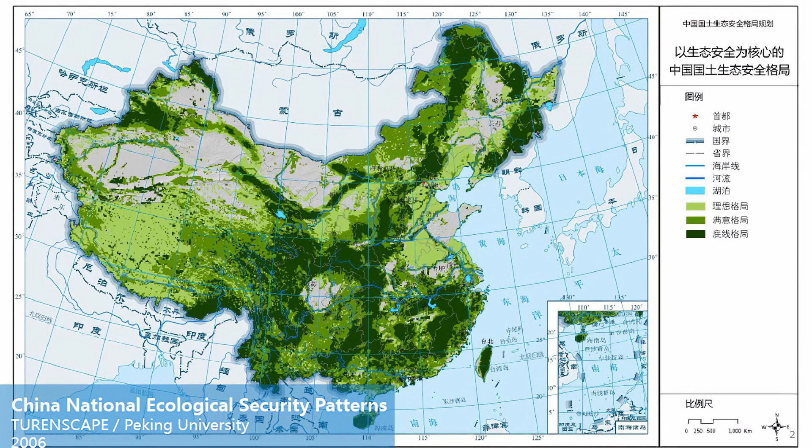That means we Chinese have been living with and managing water for thousands of years. Our ancestors had lots of wisdom of adapting to water. Let's look at these typical small villages in southern China. This is actually Professor Kongjian Yu's hometown, a typical village in southern China, which has had a great influence on his design philosophy.

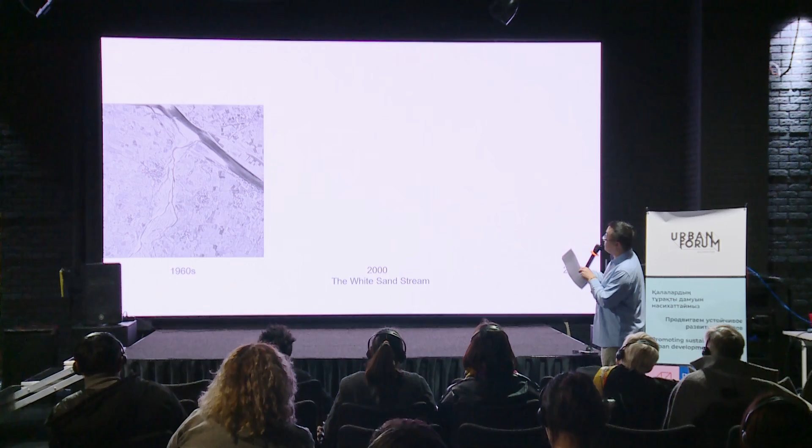However, when urbanization comes, we channelize the river to grab land for development, but we forgot things we did for hundreds and thousands of years, forgot those nature-based solutions. You can see how Professor Yu's hometown was transformed from this natural form of the river to this channelized canal.

This is the 1960s, 2000, and today. This makes the river lose its resilience. We spent billions of dollars channelizing the river, building dams, trying to protect villages and cities from being flooded. But actually, the flood only became more serious. Why? Because we enforce and accumulate the disaster, the destructive force of nature and destructive force of water. That is what we experienced in China about 20 years ago.

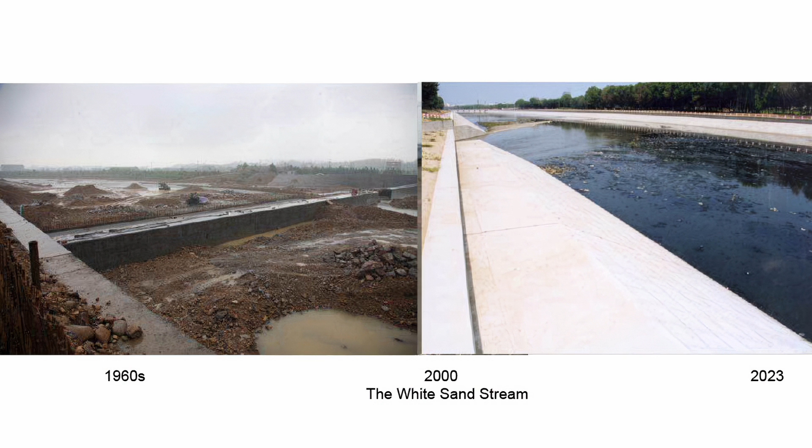Due to climate change, the whole world now faces more and more severe challenges like flood, drought, pollution, and habitat loss. Conventional solutions are single-minded. Of course they can be effective in the short term, but in the long term they literally destroy the natural system. But have we solved the problem yet?

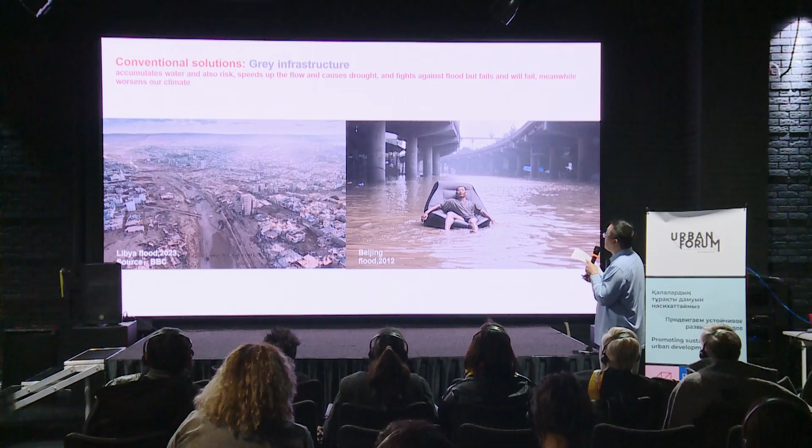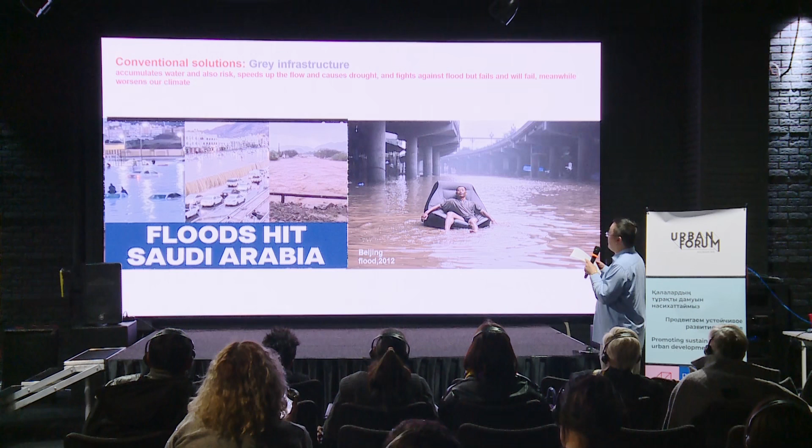Certainly not. In 2012, 79 people were killed due to urban flooding in Beijing, our capital city. Not only in Beijing - similar things happened in Libya and Brazil and even Saudi Arabia, places you'd think would never have this event, but it does happen. The conventional solutions have failed and will continue to fail.

And if you build a higher dam, you will have more carbon emission. According to research, 8% of carbon emissions come from cement.

So you can imagine how much carbon emission could happen if developing countries are going to build the same number of concrete dams as China or the United States.

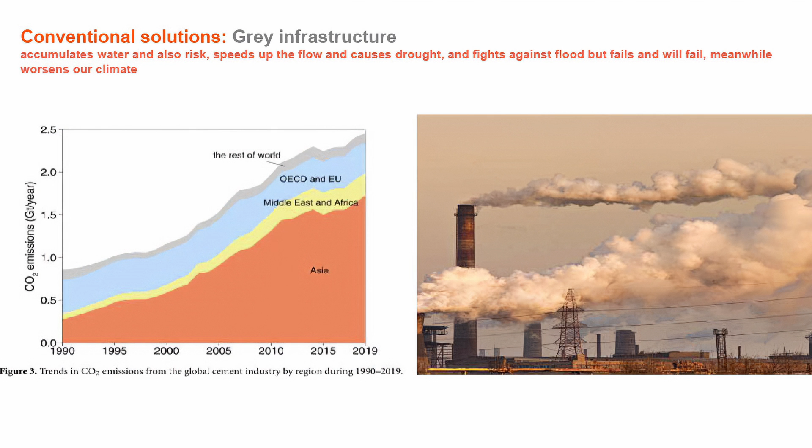According to another research, 40% of sea level rise is actually caused by the depletion of groundwater and the drop of the aquifer. This water should have been held under the ground, not in the sea. But we drain all the water into the sea and pump out groundwater for irrigation. Many people talk about the melting of glaciers, but almost no one talks about the groundwater.

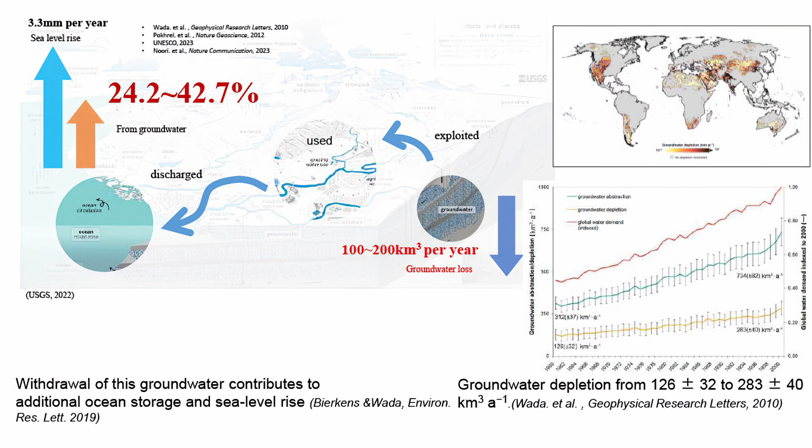If we can control and maintain the water on the ground, on the land, we can actually solve about half of the problem. So we have to find an alternative solution to make use of water and solve the problem holistically. This comes to the nature-based solution, ecological infrastructure, not the concrete or gray infrastructure. Of course gray infrastructure can solve immediate problems in the short term, but in the long term we have to consider the nature-based solution.

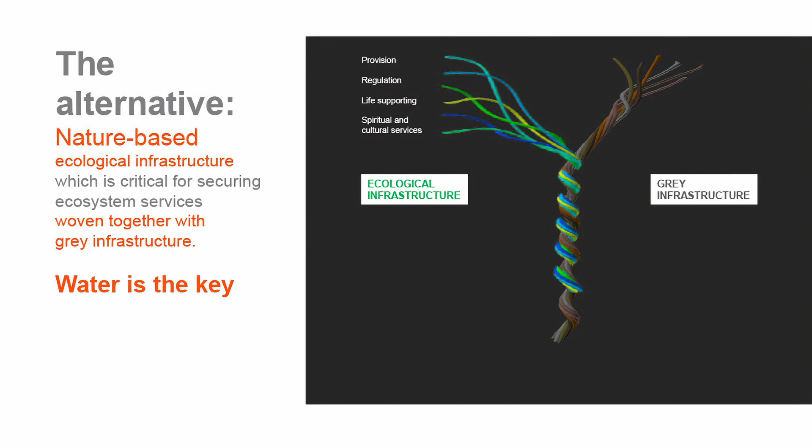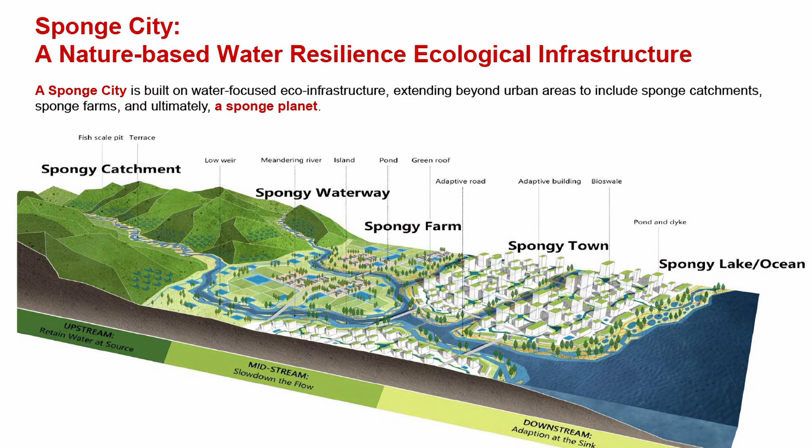And for this, water is the key. A city built on water-centered ecological infrastructure is what we call a sponge city. Such ecological infrastructure must be built beyond the boundary of the city. We also need sponge catchment, sponge farm, and ultimately even sponge planet. Think about the upstream terraces and slopes, farms, and then you have the city and the coastal front. This systematic solution builds a resilient city, a resilient territory, a resilient nation.

So its key philosophy is to retain water at the source. Whenever the water falls, you should keep it, and then slow down its flow. Don't channelize it and flush it away like a toilet. Be adaptive, embrace the water at the end of the watershed instead of building a wall. This kind of philosophy is totally opposite to the conventional solution of gray infrastructure.

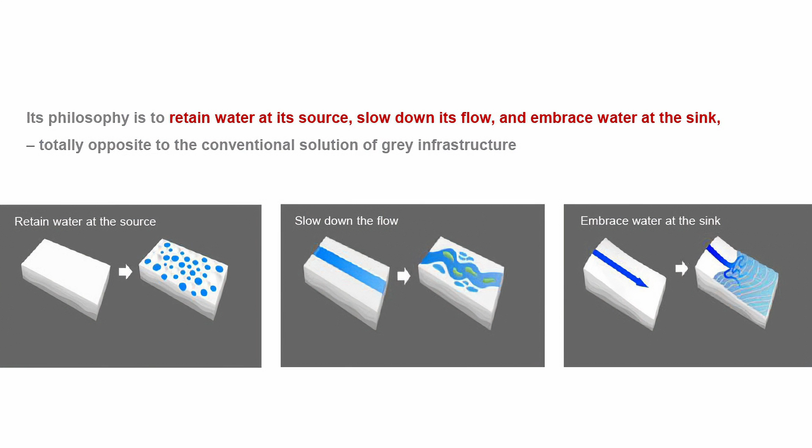The inspiration comes from our monsoon culture. Look at how the Chinese built their territory for 2,000 years, with rice paddies—imagine hundreds of thousands of rice paddies on the slope to catch thousands of millimeters of rainfall. A very simple tool, not so complicated.

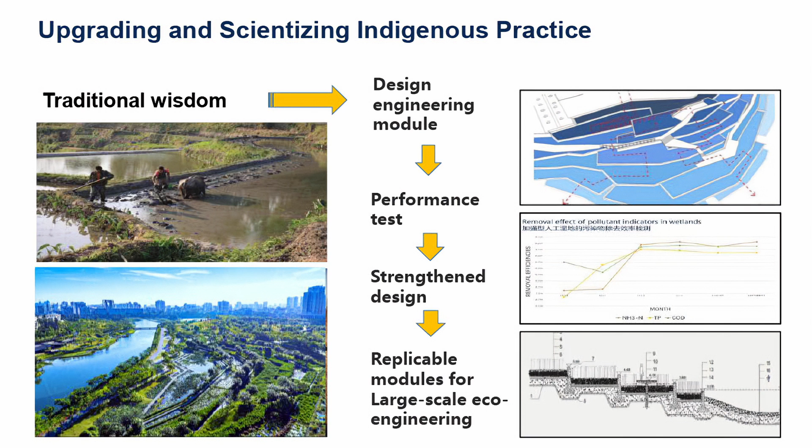And in the delta area, where the flood merges, you have a similar strategy—this pond and dike system is productive, diverse, and beautiful at the same time. We develop and upgrade this traditional Asian wisdom into replicable design and engineering modules with scientific method and proof, applying them to modern ecological engineering to retain water and make it more productive, diverse, and beautiful. That doesn't cost much—techniques such as terracing, weiring, diking, ponding, and islanding.

These all come from Asian wisdom and knowledge, and are not limited to monsoon areas, but can be applied all over the world. For the past 25 years, we have built more than 1,000 projects in more than 200 cities. Most of them have proved to be very successful, and certainly they didn't solve all the problems, but I can show you what can be done and what cannot.

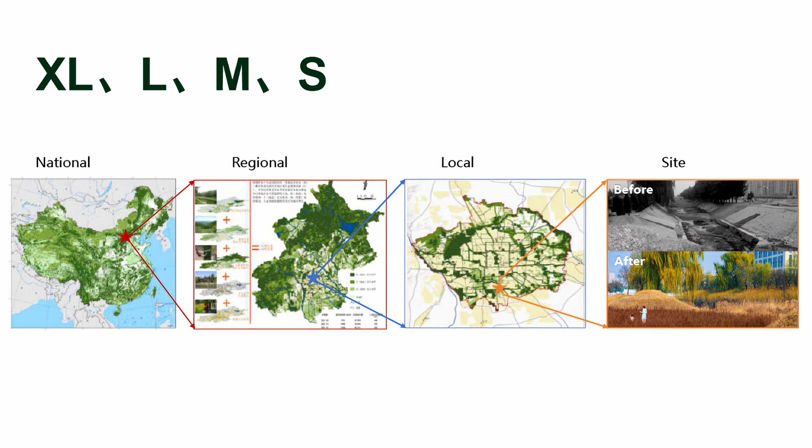All of these projects share a common feature: they are always holistically and systematically designed to provide multiple kinds of ecosystem services for native species, for people, and for the planet as a whole. This kind of infrastructure must be planned across scales, from national territory all the way to the community garden—multiple scales, dealt with systematically.

For example, this is the sponge city planning we did for Guangzhou City—7,000 square kilometers. We identified the space that can retain water at the upstream, slow down the water during its flow, and we keep all the creeks, rivers, and streams to slow down the water. At the end, where the city was usually built, we need to find solutions to adapt to flood and drought.

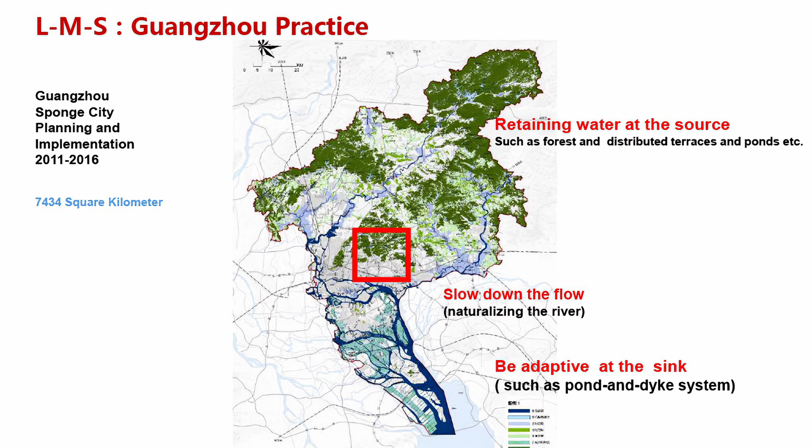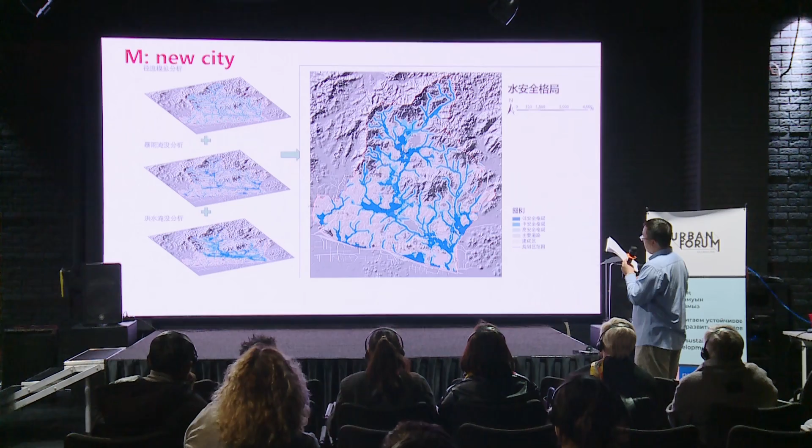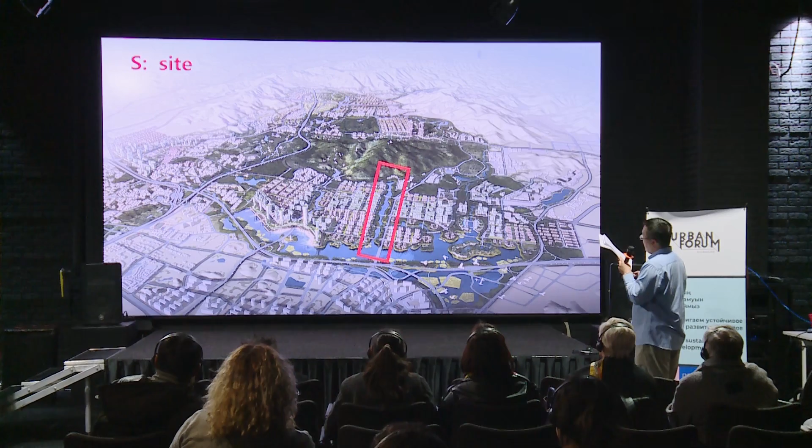And then at the site scale, we built a constructed project for this green corridor. So you can see how it was built, very beautiful. So people love it, birds come to the city, the temperature gets cooler, and certainly the water can get purified.

And then I will show you some examples that reflect the key philosophy of the nature-based smart city. So the first principle is to retain the water at the source. This project is located in Sanya City in southern China. First we did the urban scale smart city master plan and identified this space where the urban flood happened every year, and the project is right in the middle of the city, called Dong'an Wetland Park.

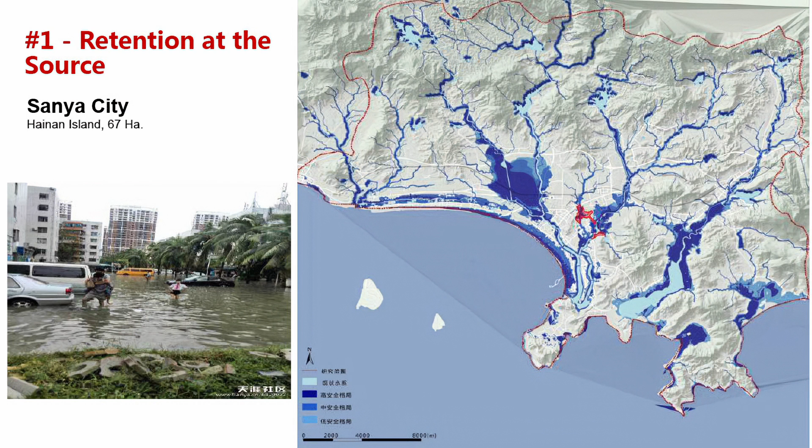So our solution was quite simple. We terraced the slope, ponding the ground, and islanding the water. So in just 1 year, this is the construction process, we transformed this flooded area into a very beautiful urban park. So you can see right in the middle of the city, we created a sponge that can not only regulate water, but also serve as a beautiful park, and also habitat for birds and other species, so people enjoy it.

And this boardwalk, in normal seasons, is for people, and in the rainy seasons, for a week or a month, it can be flooded like this. So that makes the park a resilient park, and it can contain more than 1 million cubic meters of water. So this is an image in 2024. When the historical flood comes, the park still works very well, and people can still use it through this continuous skywalk system.

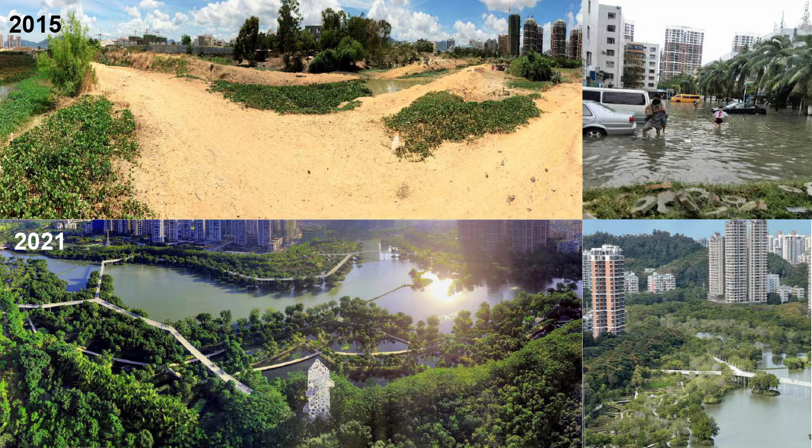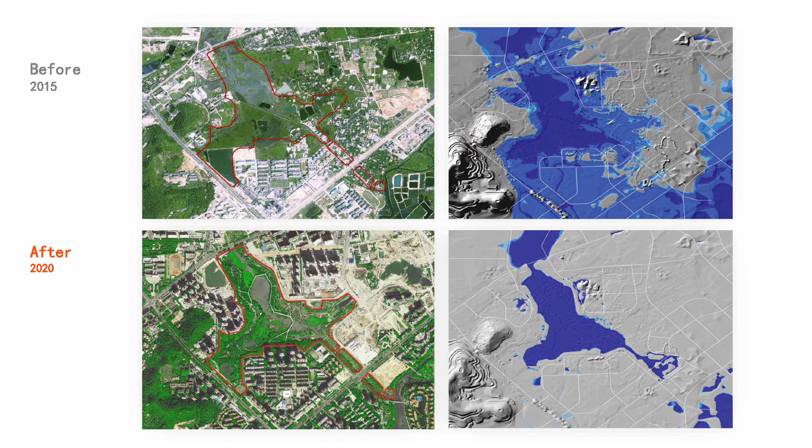So this is also a comparison of the before and after. 10 years ago, it was an abandoned land and also a flooded land. And today, it becomes a vibrant urban public space. And this is the flooded area 10 years ago. And after the park was built, you can see the flooded area decreased significantly. And also you can see the park works as a catalyzer for urban development. Now this area is working as the new CBD area of the city.

So here comes another case. Not just in China, we can have similar cases everywhere. Here is the Benjakitti Forest Park in Bangkok, Thailand. We did this project during the COVID-19 pandemic. It's also right in the middle of the city. It used to be a cigarette factory. The Bangkok government wanted to remove it and build a park for the citizens of Bangkok, and also as a gift for the Queen Mother's birthday. Also, they wanted to solve the problem of urban flood, of course.

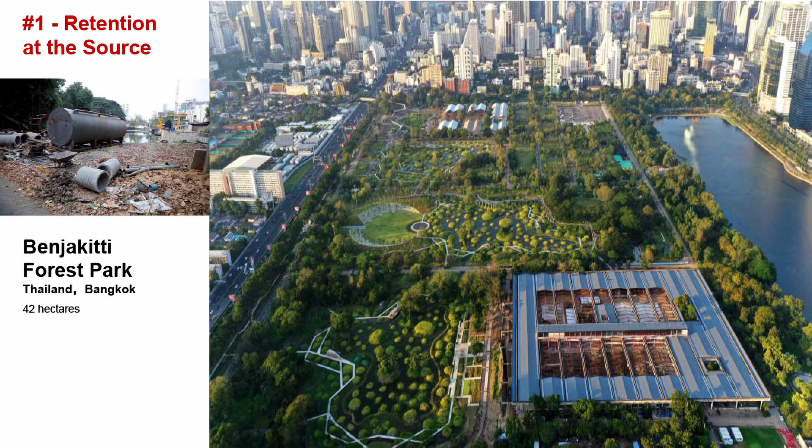So what we did is a very simple solution. It can be created by even one excavator very fast, and only in 1 year you can build it. This is the construction process, and that is today. As soon as it opened, it became the most popular park in Bangkok. Here are some of our major concepts.

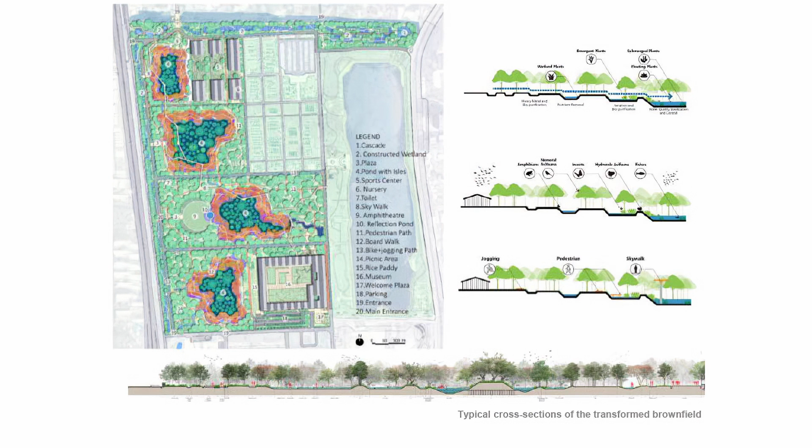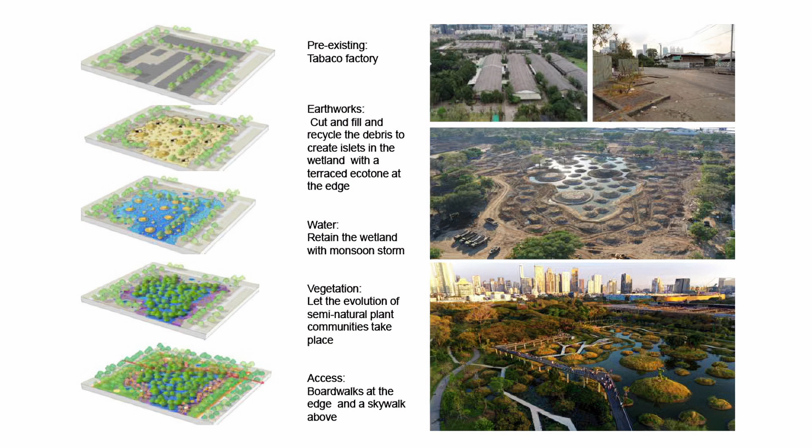First, we removed all the concrete hard surface of the ground and then used the simple cut and fill technique to keep the budget low and also balance the soil and create a sponge, an urban reservoir with hundreds of small islands. These small islands can purify the contaminated water from the canal in the north and let water come into the park. Then we integrated green and blue together to create an urban jungle for biodiversity. The last thing is to add a continuous pedestrian system and a multi-dimensional walking system for immersive activities in nature.

These are current photos. So you can see right in the middle of the city, the CBD, with diversity of space and a place for people. All the existing trees are preserved and protected on site. Most of the activities take place under the canopy, which mitigates the urban heat island effect a lot. And as I mentioned, these simple solutions keep the budget at a very low level. The construction cost is less than $20 per square meter. It's very low, less than a quarter compared to a normal park.

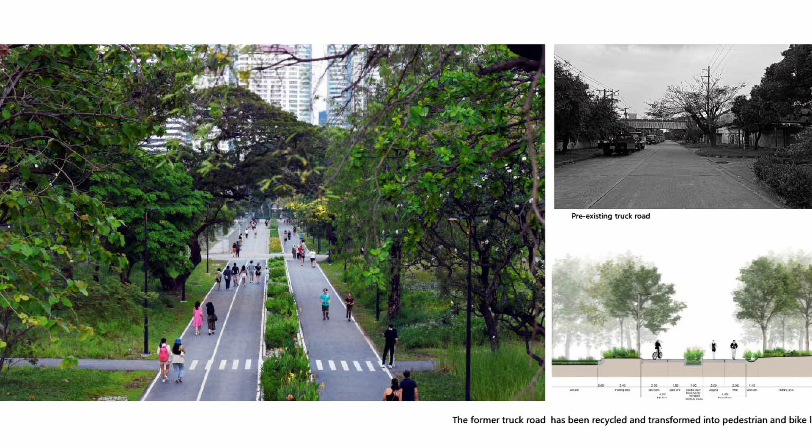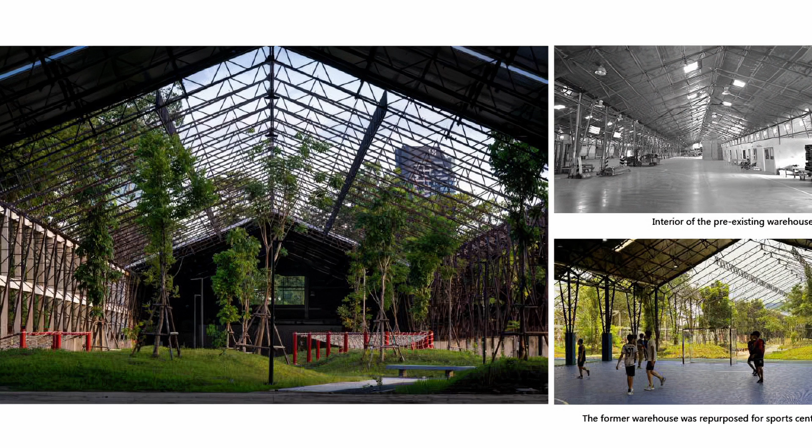And certainly it becomes the catalyst for urban development, and the property value increased dramatically. The pre-existing truck road became this pedestrian road with sponge city facilities such as bioretention ponds, and the previous warehouse was transformed into public space integrated with nature, working as a sports field or a stadium.

The water must be purified. The polluted water nearby, you can see from the north, is a very polluted canal. So the water from the canal is purified by our nature-based wetland system, and it has proved to be effective through the continuous monitoring of local environmental groups. Their data shows that the water purification effect is very good.

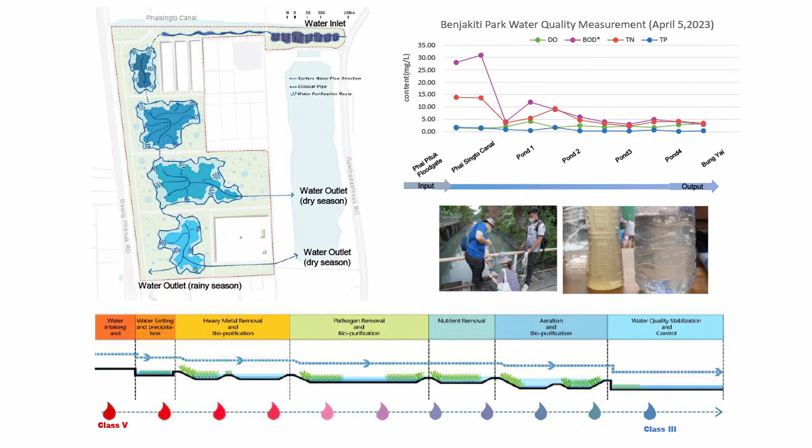The park became a rich biodiversity area for birds. According to the statistics, since the opening of the park, 91 species of birds have been observed in the park. So it also became a very good environmental education center for children. Also, on social media, the local people voted the park as the best park in Bangkok.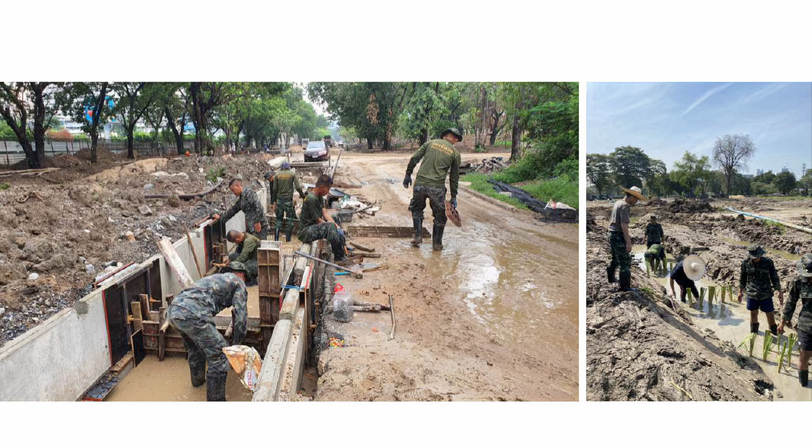Under special conditions because of COVID-19, they could not find enough skilled workers to build the park. But since our solution is quite simple, even the army could finish the construction process. So everywhere in the park was built by the army in just 18 months.

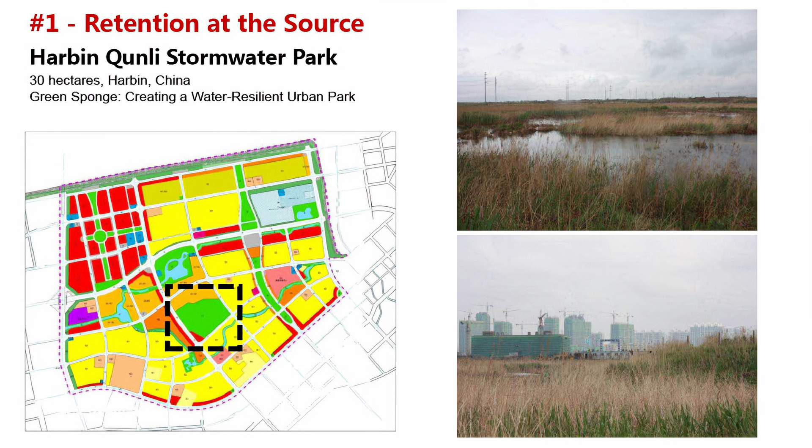And not only in tropical areas, the similar solution also works in relatively dry and cold areas. This project is in Harbin City in northern China, near the China and Russia boundary. The site used to be a natural wetland under degradation and invaded by urban construction activity. Through our design, the park serves as a core green sponge for the new urban district.

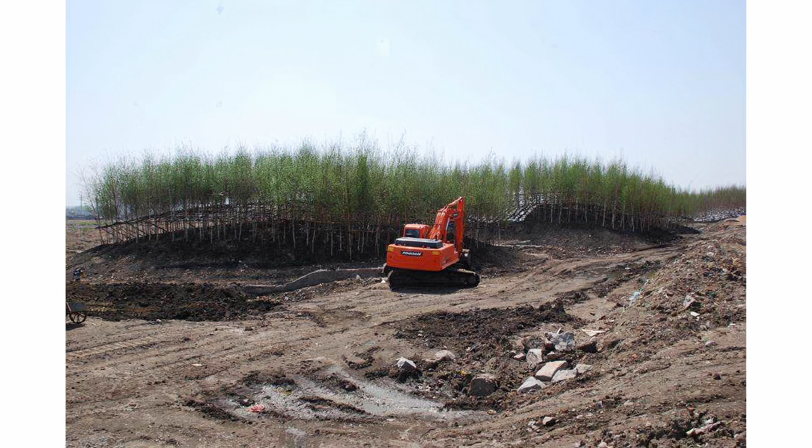Also through this simple cut and fill technology, we create an outer ring of mounds and ponds, acting as the buffer zone between nature and urban, and also filtrating and purifying the stormwater. Public space and a multi-dimensional pedestrian system are integrated in this buffer loop, leaving the core wetland as a natural habitat for animals. You can see a very simple way to create this birch tree mound; even an excavator can make it.

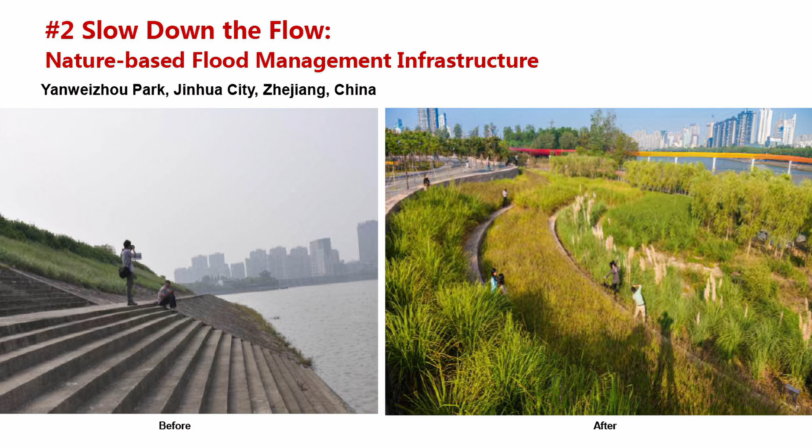Then the second principle is to slow down the flow. This project showcases nature-based flood management infrastructure located in Jinhua City, Professor Yu's hometown. You can see this is the before condition, and this is the after condition. The local authority wanted to make the city safer. The conventional solution is to build higher and higher flood walls. But our solution is the opposite. We remove the existing flood wall, set it back, and let water come in, forming a beautiful park that is resilient to multiple levels of flood.

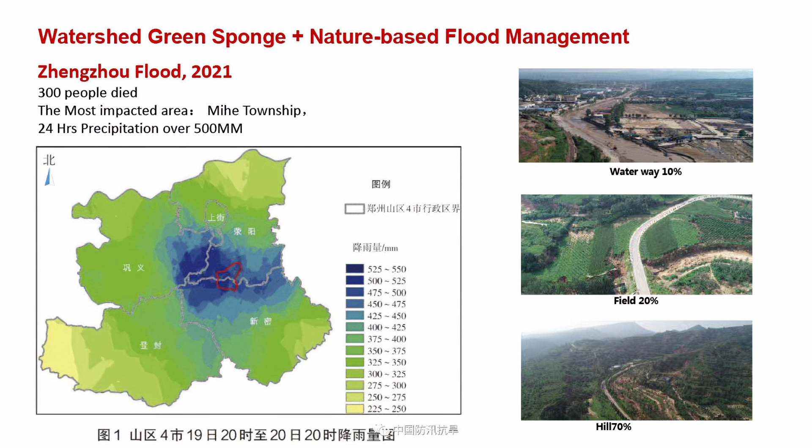This case is in Zhengzhou City in the central part of China, a water-stressed region with average annual rainfall of just 600 millimeters. But 4 years ago, in 2021, more than 300 people were killed in a historic heavy rain. The rain dumped over 500 millimeters within 24 hours, almost the whole year's rainfall in just one rain. Even great infrastructure could not withstand such an extreme disaster. You can see the images after the disaster. Almost the whole city was destroyed.

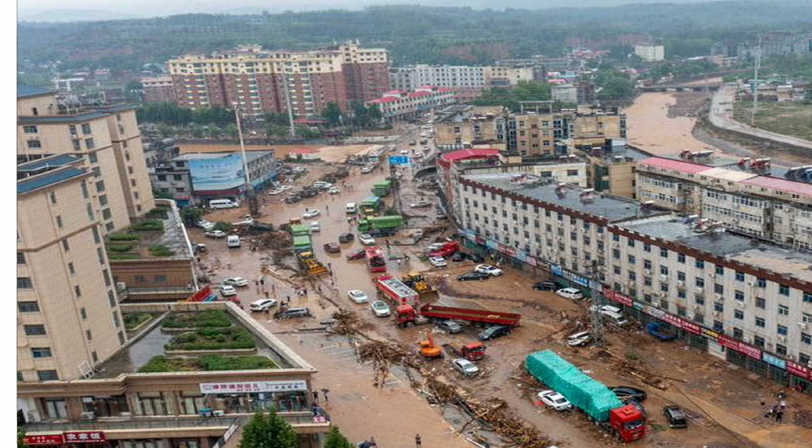Our solution to restore and rebuild the city is to build a watershed-scale green sponge, nature-based solution framework to rebuild ecological resilience. It's not just conventional river restoration. We implement holistic watershed planning with sponge valleys, sponge farmland, and sponge forests. First, we integrate the farmland and forest to establish a decentralized and distributed retention wetland system at the source of the watershed.

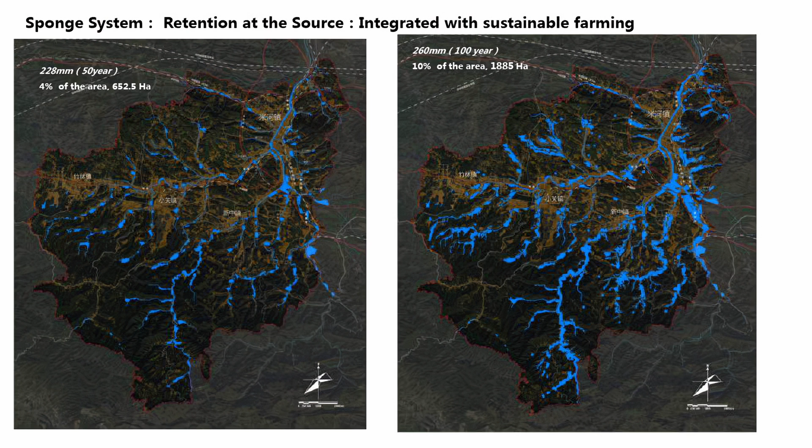Then, under extreme conditions, 10% of the land can be enlarged to reduce the flood peak and slow down the flow of water throughout the entire process, rather than concentrating all the flows in channels. So using this hydrological modeling, you can see the hydrological model simulation, the before condition and the after conditions through our planning.

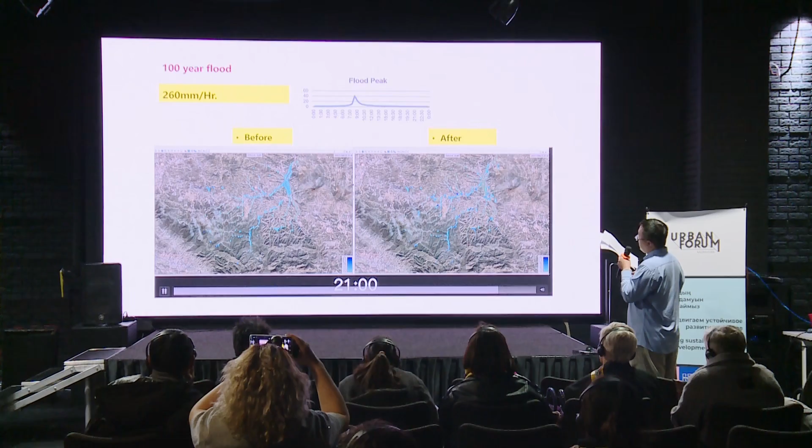It demonstrates significantly delayed peak discharge timing and also reduced flood peak. Similarly, we modeled this sponge system's response to the historical storm event in 2021. The results show that the peak flows can be delayed by at least 4 hours. That means it provides a critical window for people's retreat that can reduce casualties. And also this system reduced the flood peak and decreased the waterlogging depth by 42%.

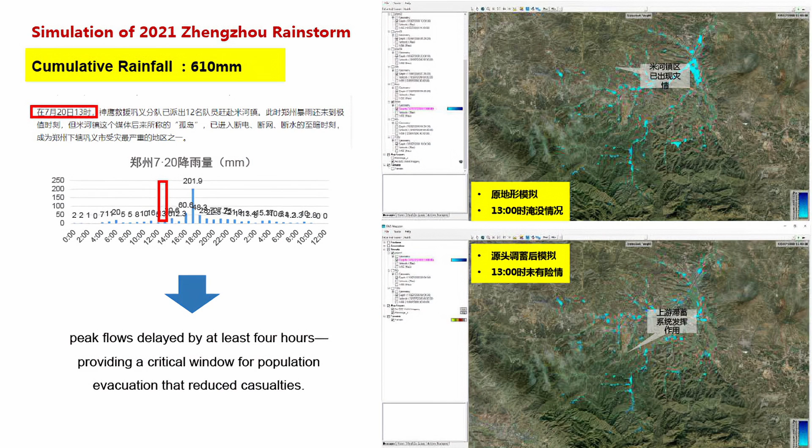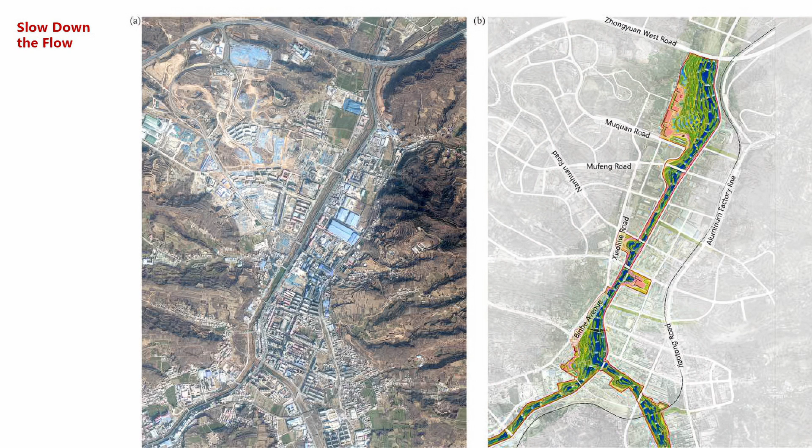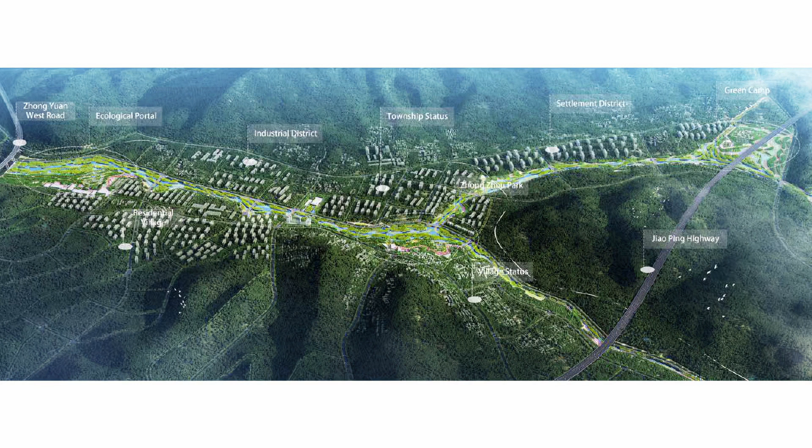And second, to restore this main water channel destroyed by flooding, we abandoned the conventional channelization techniques. Instead, we restore the river's corridor as a natural form by designing vegetated islands and constructed wetland, slowing down the flow while creating public access for waterfront engagement.

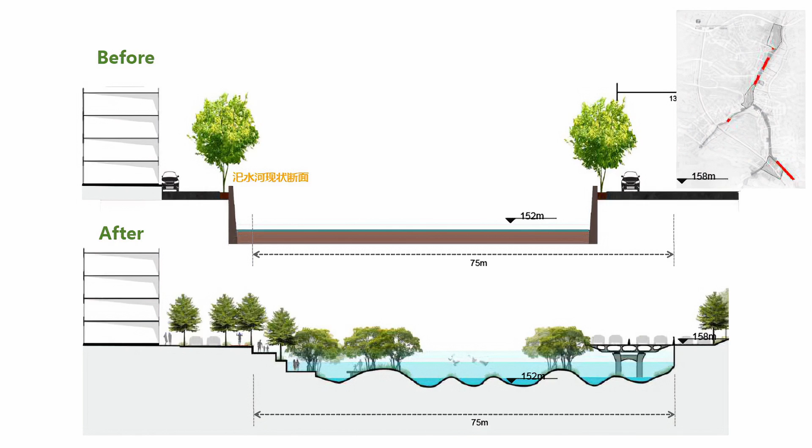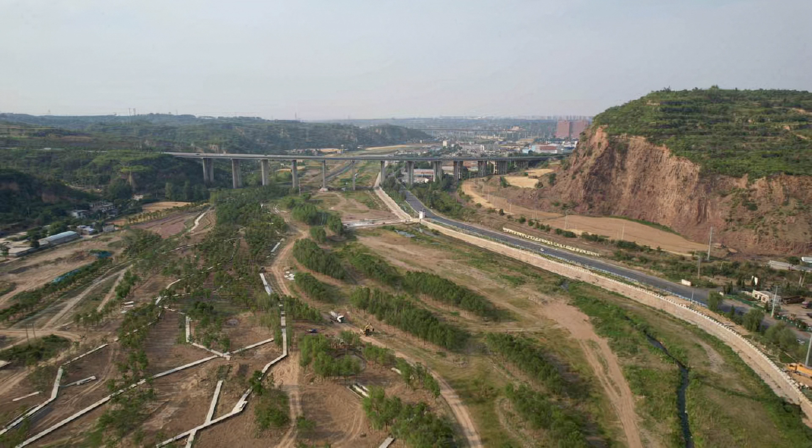So you can see this section shows that our nature-based solutions enable smarter and spatially optimized land, giving water more space. Before the design, during flood, the local flow speed exceeded 10 meters per second, causing instability along the river banks. But after our design, you can see our nature-based solution is under construction.

So this is also the hydrological modeling. Before, the water speed was more than 10 meters per second. But after our design, we significantly decreased the water speed, dramatically alleviating the erosion along the river banks through effective energy dissipation and flow reduction.

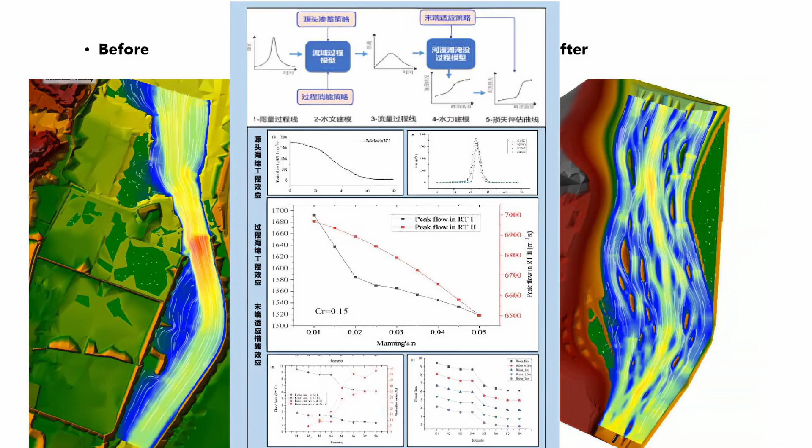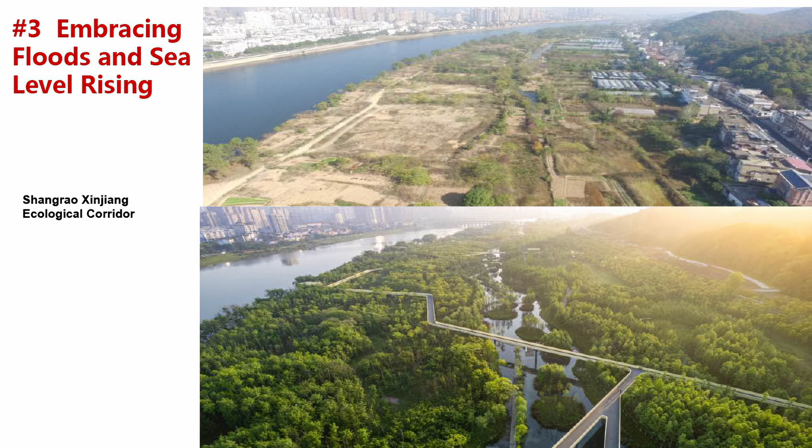So here comes the third principle. Not to fight against the water, we need to embrace the water. In this project in Shangrao City, for this natural flood plain, we didn't build the flood wall. Instead, we integrate the flood plain, let water come in, embrace the water, and now it becomes a thriving ecological infrastructure. So this is the before condition.

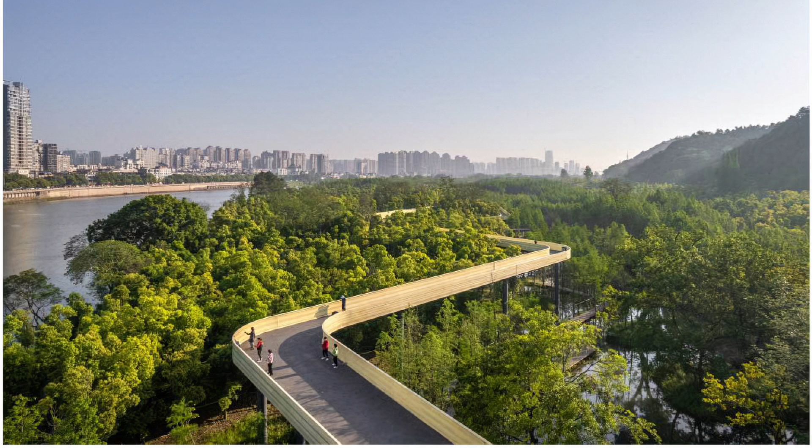When the flood comes, this park can still be resilient. After the flood goes away, it's still a very vibrant park. Also, people can use this elevated skywalk to immerse themselves in nature, and now it becomes the new landscape landmark for the city.

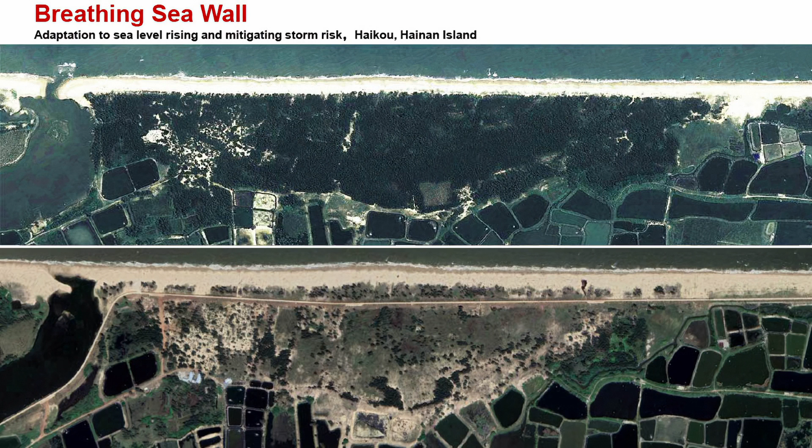So here is another case in the coastal area. You can see here after the flood wall was built, the original habitat with beautiful vegetation got destroyed, like in the image below. That is because when you build the wall, the waves flip over the wall and the salinity kills the vegetation and also enforces the erosion process.

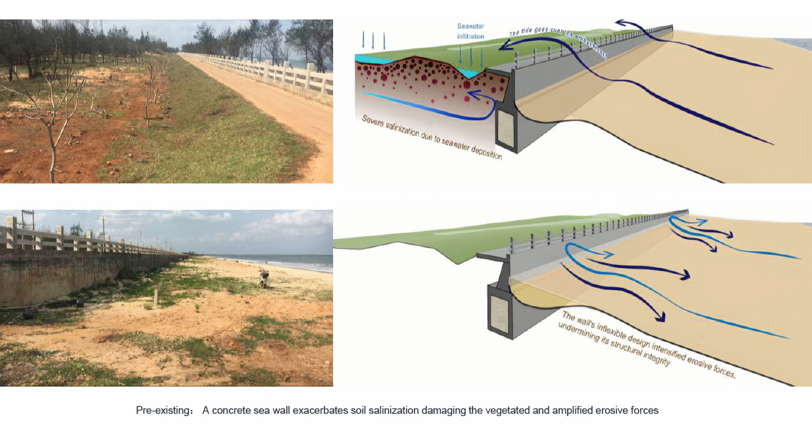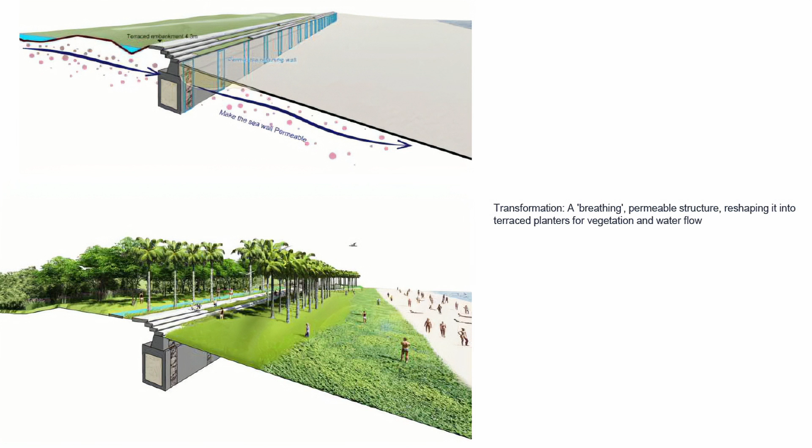So the opposite way is to create a breathing wall, like a breathing coastline, to let the water come back to the ocean, enabling the salinity exchange. This is the process of how this breathing wall was built. This is the before condition, and this is after. Now it becomes a beautiful, breathing living wall, flourishing the native vegetation and enhancing human and nature interactions, also serving as an urban balcony for residents and tourists.

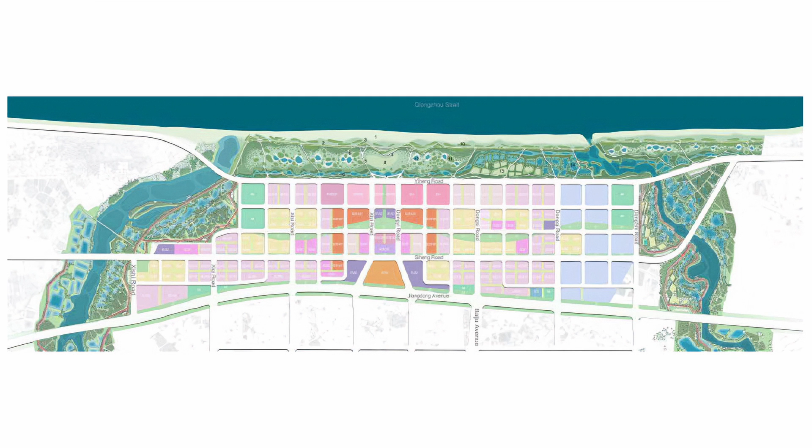Moreover, it also catalyzes urban development. This nature system becomes the protector of the new urban district rather than just green infrastructure. We have this brand new urban district rising rapidly. And just last year, a historical typhoon hit the coastal area of China. Right after the typhoon, the conventional seawall was totally destroyed, but our breathing seawall survived the typhoon and still looks in good condition. So that is the power of nature-based solutions.

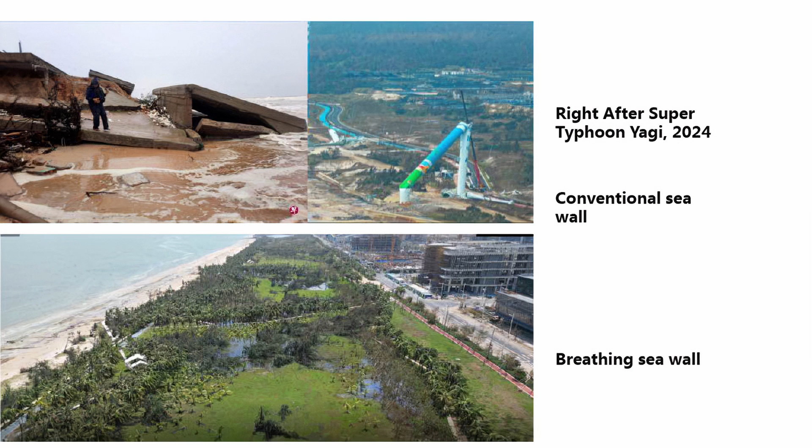And then the fourth principle is nature-based water cleansing, the landscape as a living system. As we all know, pollution is another big problem, particularly in developing countries. 85% of the sewage globally goes into rivers and seas without any treatment. As a solution, the nature-based constructed wetland can remove nutrients through biological processes and clean the water.

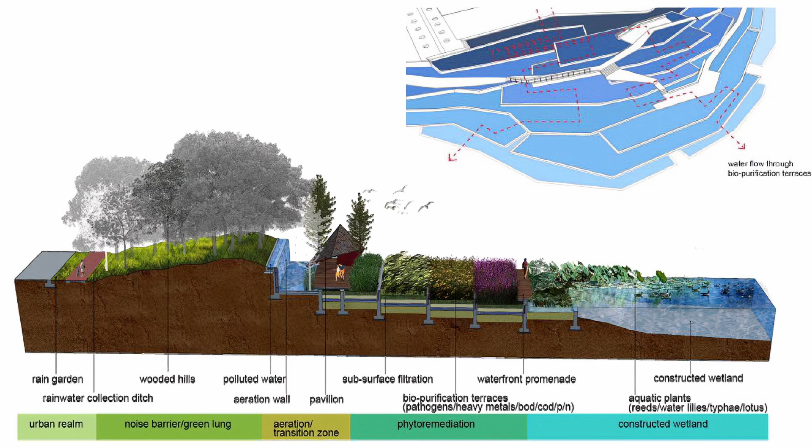This project case is also in northern China. It used to be an abandoned coal mine and dump area. Inspired by the terraced rice paddies in China, we terraced the dump and developed a water purification system. Three kinds of wetland are applied: the free water surface terraces, the subsurface flow terraces, and the retention ponds integrated together.

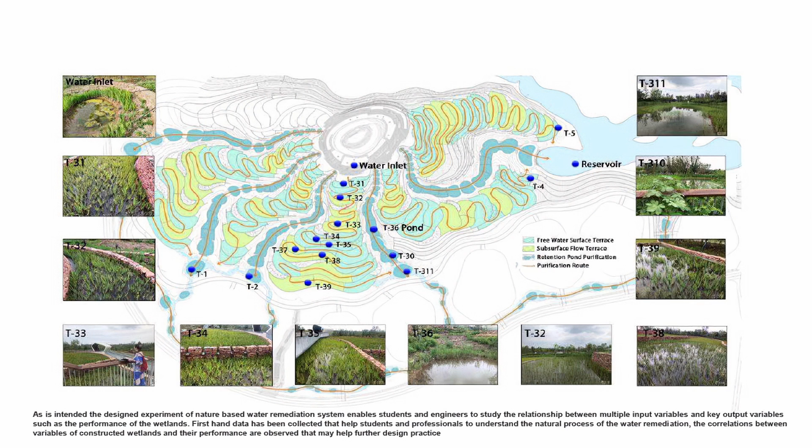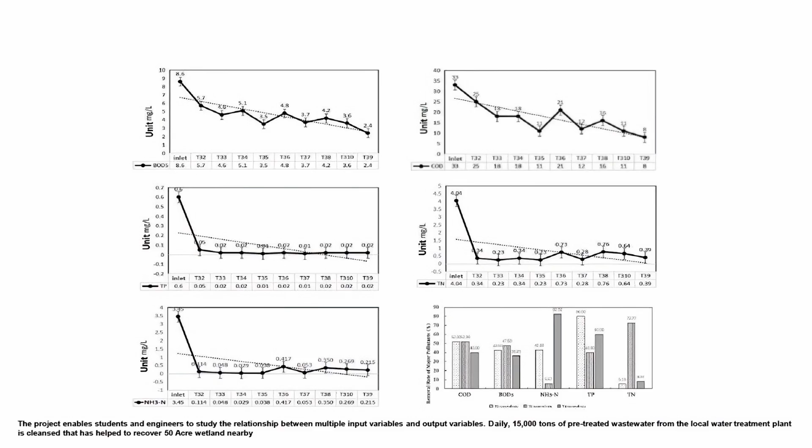In just 1 year, we created a water purification system, at the same time solving the problem of urban solid waste and providing this beautiful park. It's even becoming a learning center for environmental education. Also, this data can be used for our design. You can see from these statistics that the water quality is significantly enhanced.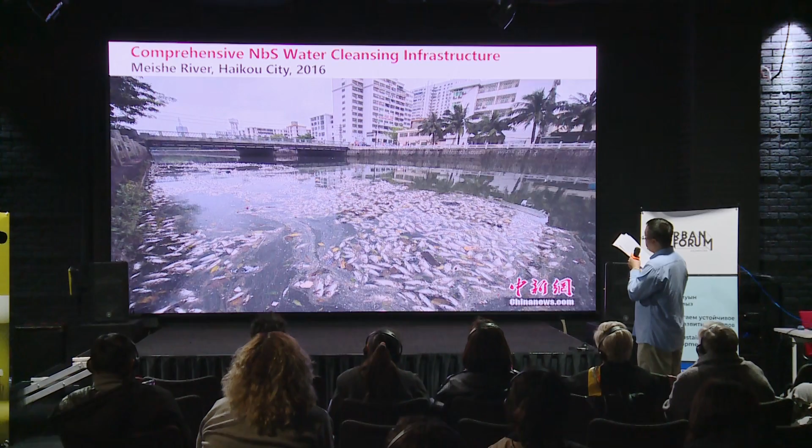So, like, heavily polluted. So what caused that? It resulted from the concrete flood wall that controls the river system, with people dredging the river, paving the riverbed, dumping trash, and it also resulted from the untreated stormwater runoff. This altogether almost totally killed the river ecosystem.

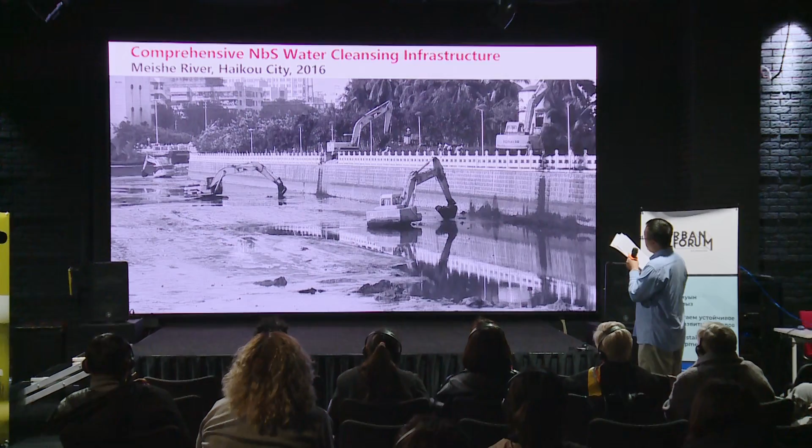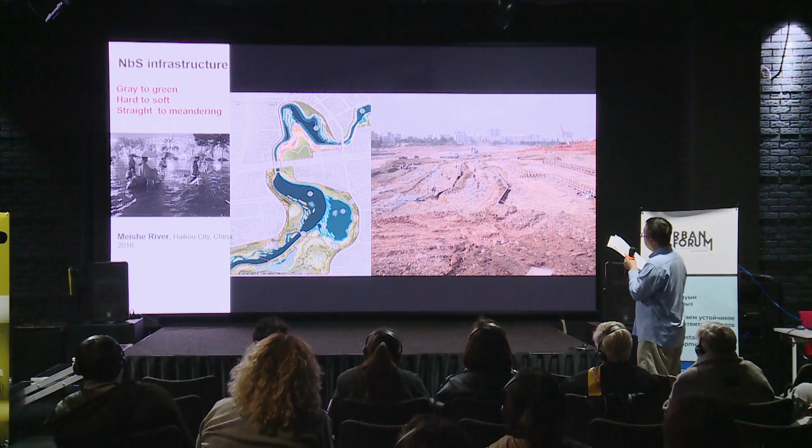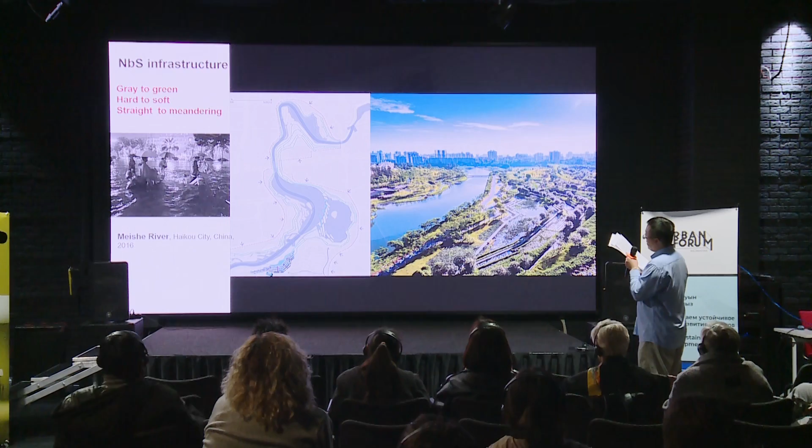To save the river, we removed the concrete, terracing the ground, and introducing the idea of sponge to create a sponge corridor. And it just took 1 year to finish the construction and 3 years for the ecology to get mature. So the whole Meishe River got transformed.

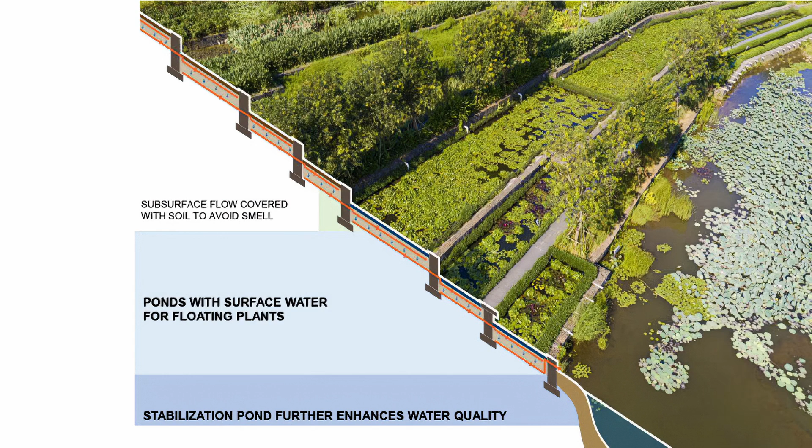And also we applied a similar combination of constructed wetland system and got a very nice water purification result. According to the statistics, 85% of the nutrients can be removed, and habitat got recovered by recycling the concrete to create this island for birds to inhabit. Also, people gather to enjoy the urban nature.

Moreover, Sponge City is not only for floods, it's about the nature-based regulation of hydroecological processes. In arid areas like northern China and also here in Almaty, we have many seasonal tributaries and ditches that are channelized and covered with concrete and only used for drainage. People avoid them, as I mentioned earlier, like this one in a town near Beijing, losing the recharge of groundwater. How to revitalize them?

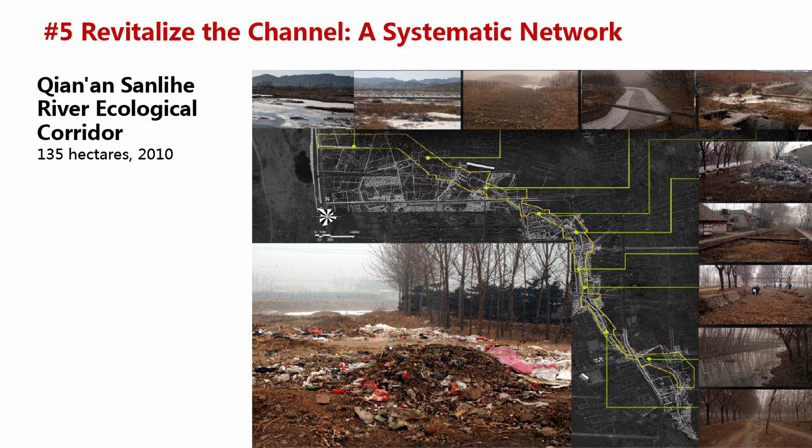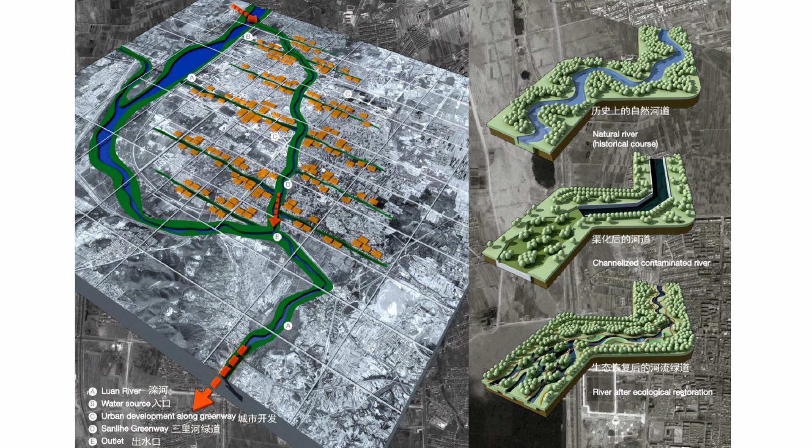Our solution is to build a systematic network of nature-based infrastructure, taking advantage of the natural elevation to connect the main river channel to the tributary and restoring the natural runoff corridor to secure water recharge. Also restore the meandering natural form of the tributary to slow down the flow and give water more space for natural infiltration, recharging the groundwater, and also supporting the habitat.

So you can see the before and after comparison. This is before, and this is after. And also this project is well recognized. It won the 2013 ASLA award, and also this image was chosen as the cover image of this book called Landscape Architecture.

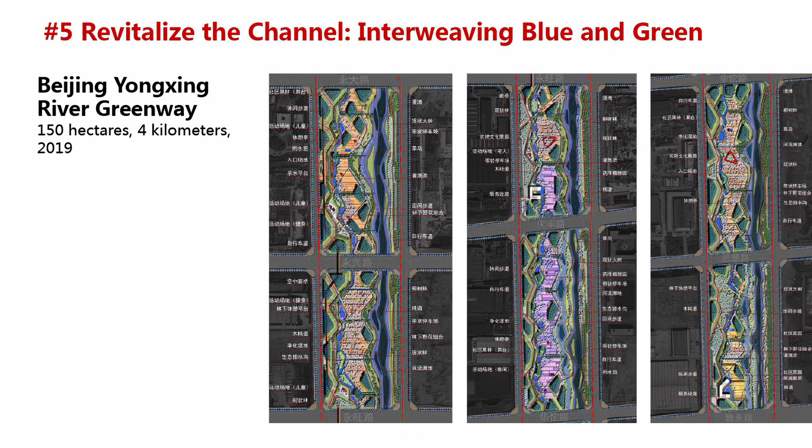Yeah, and also another case in Beijing city. So you can see the previous condition is also like a concrete channel, and people avoid it. So our solution is to integrate the blue and the green to make the concrete river like a green forest. So remove the concrete surface of the channel and restore this natural habitat.

And even during the seasons without water, it still looks very beautiful in late autumn and early winter. So people can walk into the river channel and play inside. So now it is the most popular park for the surrounding community.

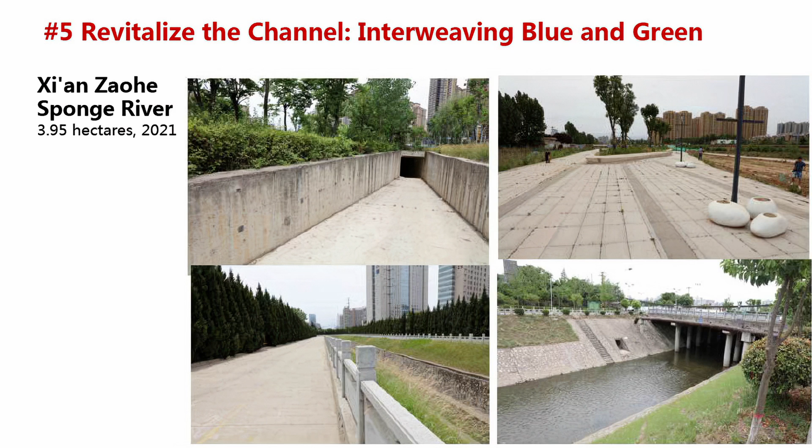And another case in Xi'an city, similar condition, and we take advantage of the elevation to build this terraced wetland and pedestrian system, transforming this concrete channel into this vibrant park.

So, and finally, the sixth principle. So what do individual families have to do with this kind of sponge idea? Make home green as a mini sponge, to start with your own home. Now this kind of building we are talking about should be a green sponge as well, like reduce energy consumption, of course, and also make the building productive. So this is just an imagination, but everyone can do something in their own home.

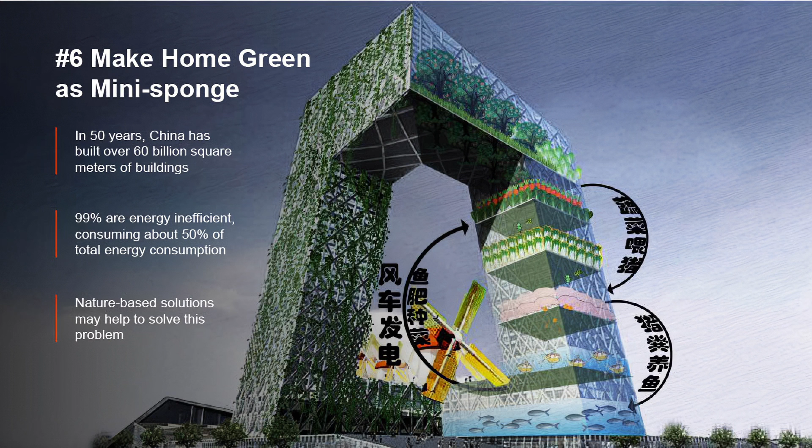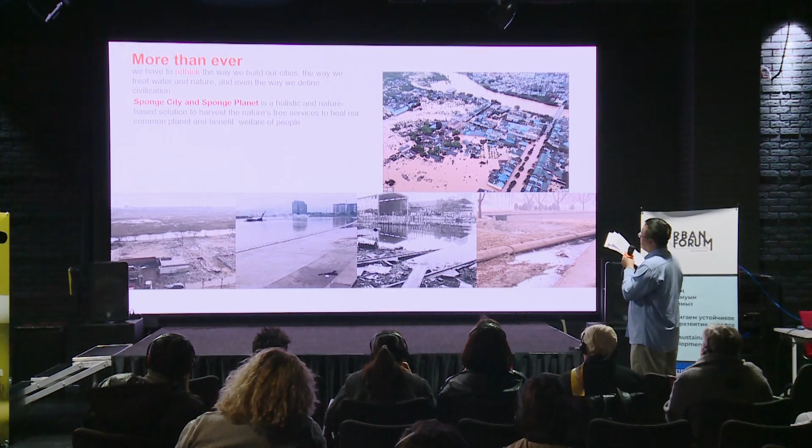We come to the last page. So more than ever, we have to rethink the way we build our cities, the way we treat water and nature, and even the way we define civilization. A sponge city and sponge planet is a holistic and nature-based solution to harvest nature's free services to heal our common planet and benefit the people.